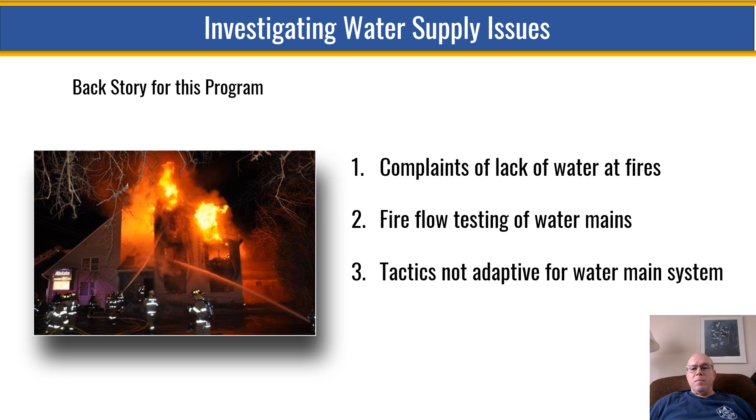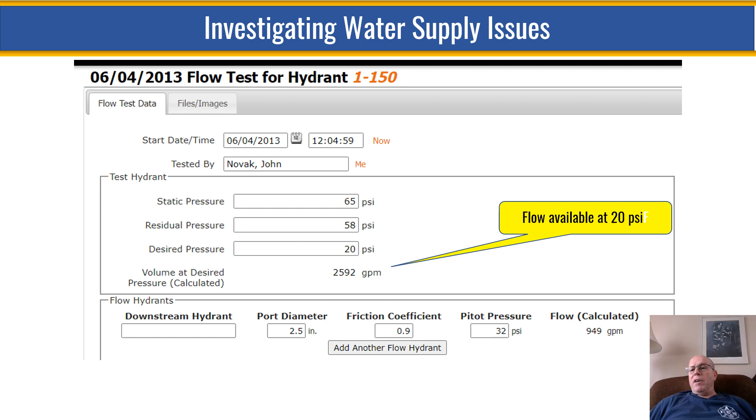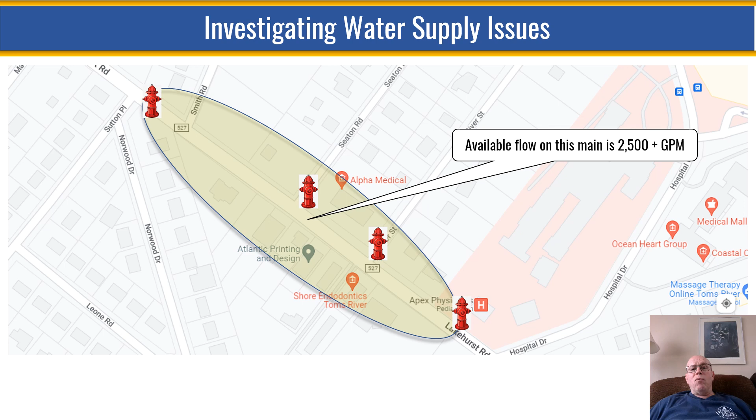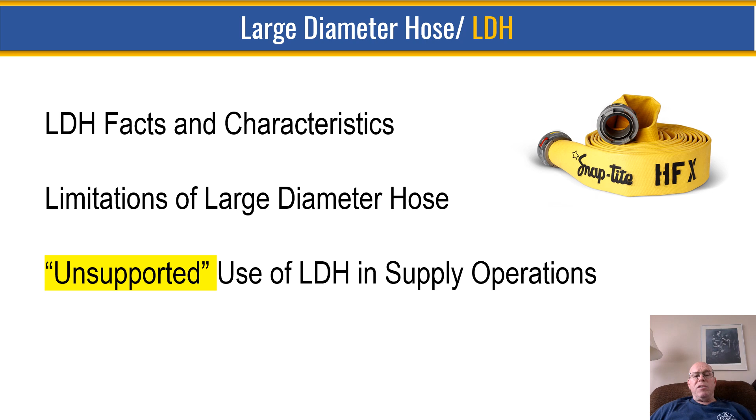Other issues that I found when I looked into the large diameter hose characteristics is currently NFPA has a test pressure of 200 psi. Formerly, the older large diameter hose was tested to a pressure of 185 psi. So again, you need to know your equipment, what age your hose is, what the test pressures are, how much pressure you can put into your hose, keep it under the test pressure. So the other issue with the large diameter hose is we talk about hose coefficients and figuring out friction loss. And I'll go over that in a second.

And then I was looking at the new 5-inch hose in my firehouse, and the Snap-tite hose, it's service tested to 225 pounds. So there's definitely an increase from the older 185 psi hose test pressure to current day standards. And again, I'm going to show it in a second, but when we talk about friction loss in fire hose, we have to look at the coefficients from the manufacturer.

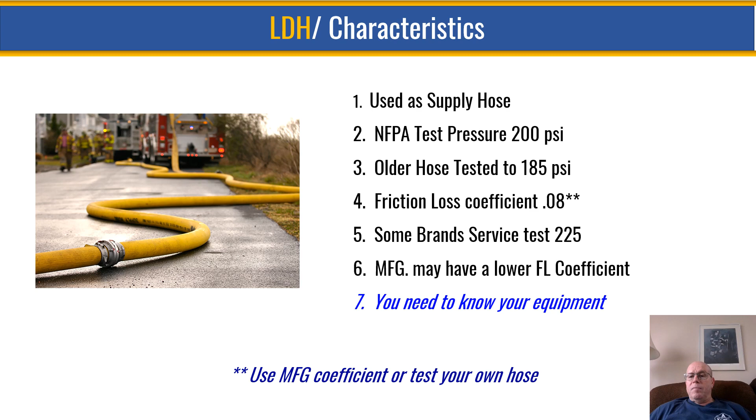So this is just an illustration of primarily how my department would do business. We would lay a 5-inch hose from a hydrant to the fire scene, right? And we're depending on the pressure in the water main system to push the water through the hose up to the attack pumper. And that oftentimes was the issue.

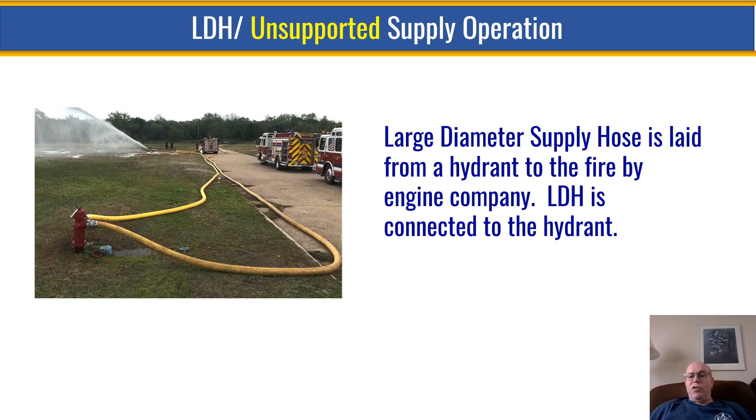Going back to the water main systems, the American Water Works Association recommends a residual pressure of 20 psi on the water supply system. This is also a minimum pressure that's regulated in my area by the New Jersey Board of Public Utilities. Reason being is they want that residual pressure high on the water main system to keep out any infiltration of groundwater into that water main system and cause contamination. Because remember, the same water mains that we use for firefighting are the same water mains that we use for drinking and everything else in domestic use.

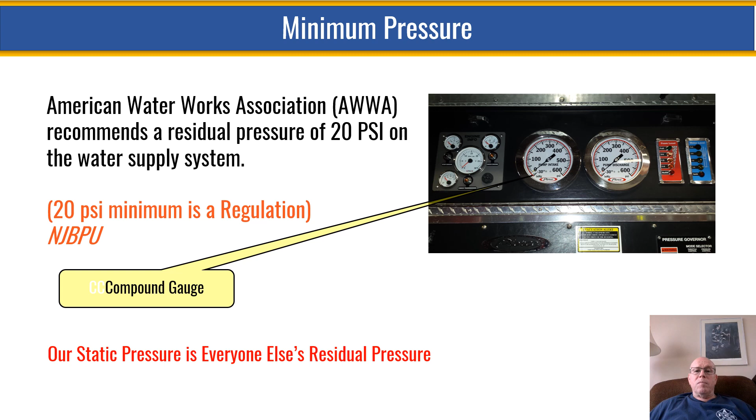So when I talked to my water purveyor, I said, "What kind of pressures do you have on the system?" And they told us they normally have a pressure between 50 and 75 psi as a standard on their system. All depends on what part of the town you live in. So that is the pressure that is available to push the water through the 5-inch hose up to the scene to our attack pumper.

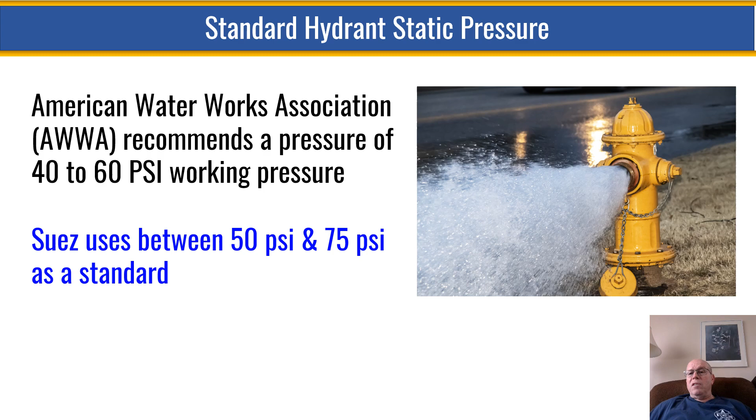So we have to look at friction loss calculations. So NFPA IFSTA gives us a friction loss formula. And that friction loss formula is the friction loss equals the coefficient times the gallons per minute squared times the length of the hose lay. So in this case, we know what the friction loss is, and I'll discuss that in a second.

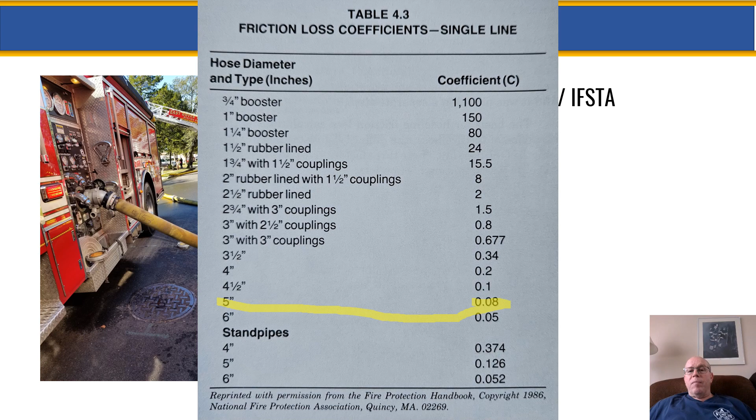But when we talk about coefficients, if you look at the table from IFSTA and NFPA, this is the table that has been around for years and years, and is more likely an average of findings to give us a friction loss coefficient. Now, if we look down here at 5-inch hose, we can see our 5-inch hose friction loss coefficient is 0.08. So that would fill into the coefficient over here.

So let me get rid of that. Okay. Stand by for 1 second.

All right, so Q. In the fire service, the quantity, the amount of water in gallons per minute when we do these friction loss calculations, is illustrated by Q. And Q is the gallons per minute divided by 100. And when we do our friction loss calculation, we take that and we square it, so multiply it by itself. So in this case, we know what the coefficient is if we're using the standard table, which is 0.08.

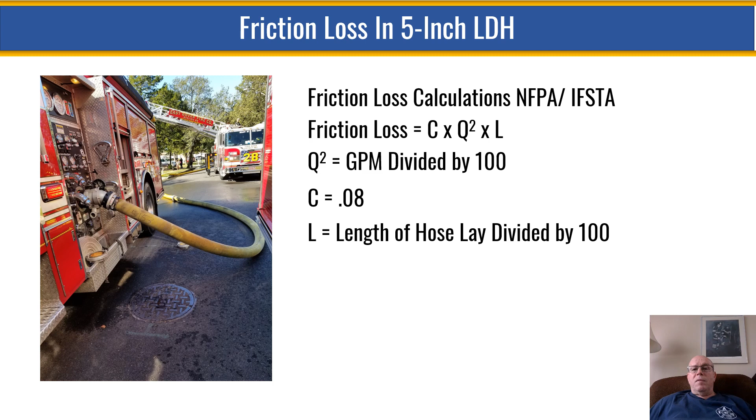We know the length of hose. So the length of hose is divided by 100. So if we have 500 feet of hose laid out, we divide that by 100. So L gives us, in this case, 5. Going back to the friction loss chart.

So I contacted Snap-tite and I looked at the supply hose that I currently use in my fire company, and it's Snap-tite HFX. So I called them up and they sent me a chart of coefficients, and you can see the coefficient for Snap-tite's hose is 0.04. So a big drop from the 0.08 standard table from NFPA and IFSTA.

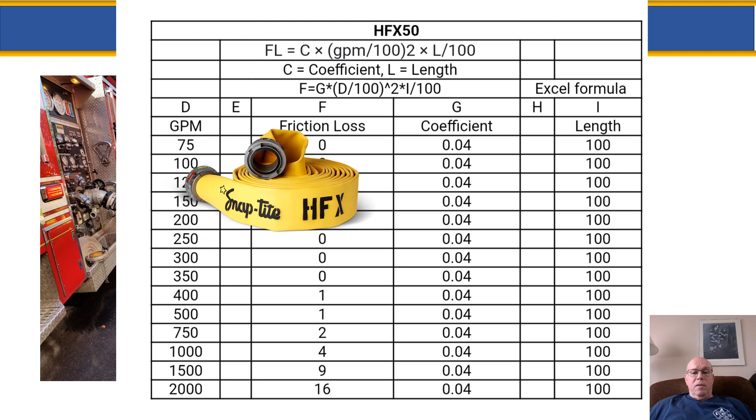So in this illustration, we're looking at a situation where the apparatus is laying a 5-inch supply line from a hydrant. And the static pressure on the water main system, in this case, is 50 psi. Let's see if I can get that. All right, so 50 psi is my static pressure on my system.

Now, I need to have 20 psi on my compound gauge. That's pretty much standard the way we teach our pump operators. So if I need to keep 20 psi on my compound gauge, I need to subtract 20 from 50. So that only leaves me with 30 psi to push the water through the 5-inch hose.

So I already know my friction loss formula. I know that my friction loss is already 30. That's available, right? I know my coefficient. I know the length of the hose divided by 100 is 5. The only thing I don't know is my Q squared. So that's what I'm trying to find. I need to find the gallons a minute available based on the length of the 5-inch hose lay and the friction loss, the pounds per square inch pressure that's available to overcome that friction loss.

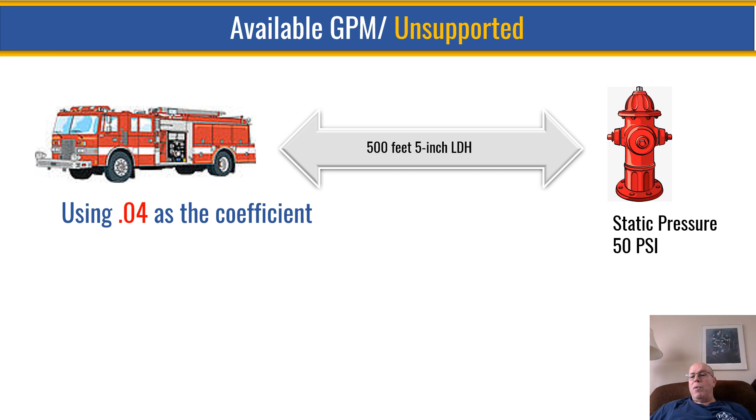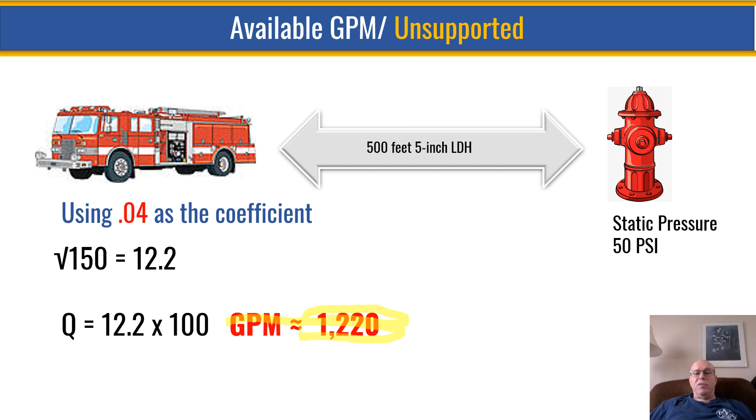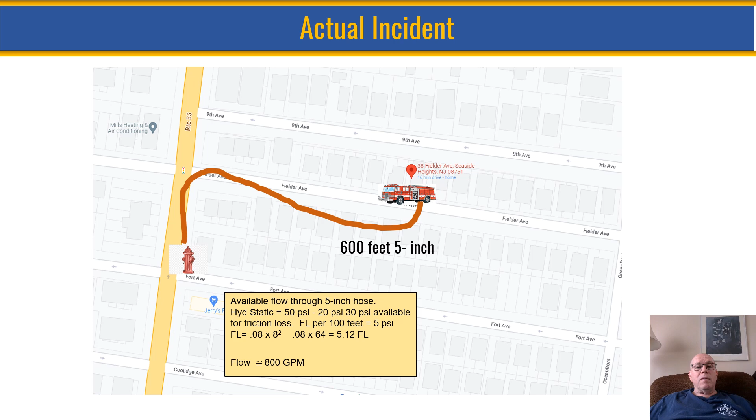So here's a real life example. And in this case, I use the 0.08. So the engine company came in, they dropped the line at this hydrant, 600 feet to the fire, and it was an issue. We didn't have enough water. When we went back and did the fire flow test, we found that there was plenty of water out there on the highway, and it was an issue of the pressure in the water main system and the length of hose lay and the friction loss limited them to having that water available.

So some important takeaways, right? Have an understanding of your water supply system. Okay, realize the limitations of your large diameter hose when used unsupported. Right? And if you're looking for big flows, you're going to need to put the engine on the hydrant and supply back to the scene.

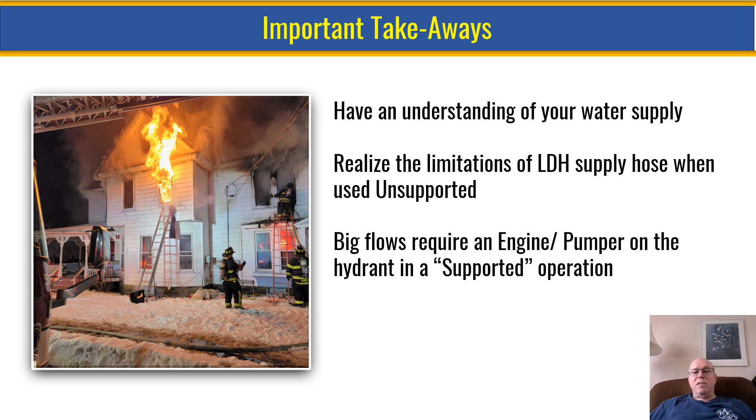So if I have a 1,000 GPM pumper on this hydrant, I'm probably not going to get much more than 1,000 GPM. Versus if I put a 2,000 GPM pumper on the hydrant and I had the water available, I could supply more water.

All right, so that was just a quick overview of some of the limitations of large diameter supply lines when they're used unsupported, and just some of the math that you can use to figure out some different hose computations based on the friction loss formula. Just doing what you call a reverse friction loss formula. Since you know the friction loss, you just need to calculate the quantity.